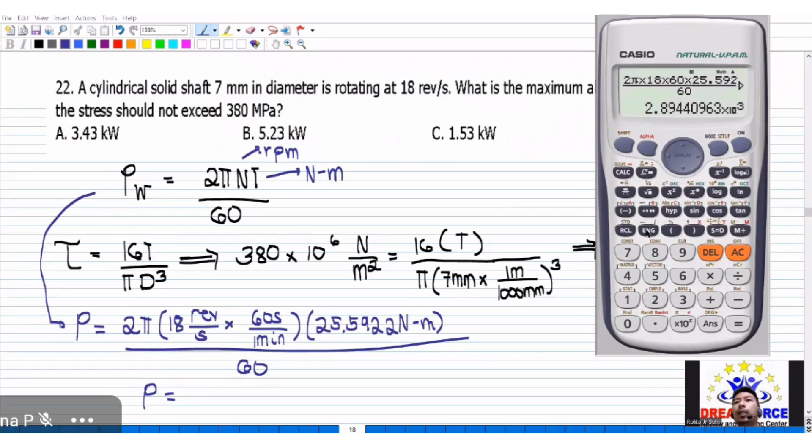So let's calculate. We have 2 pi times 18 times 60 times 25.5922 over 60. Press ENG or divide by 1K para maging kilowatts. So answer is 2.8944, approximately 2.89 kilowatts. So corresponds to your letter D. Okay, so yan si 22.

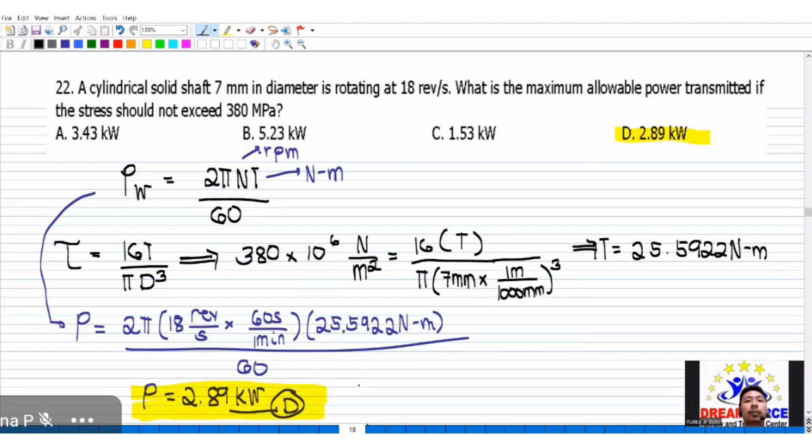Next, number 23. So 23 to 25 ay objectives. The section of a beam at which the bending moment changes from positive to negative is called, answer there is letter C, point of inflection. Again, sa mga mahirap or unfamiliar tayo, yung di natin alam yung concept, kuha ng keywords. Siguro ito: bending moment changes from positive to negative.

Next, 24. Ratio of lateral expansion to the longitudinal shortening of a concrete cylinder when subjected to compressive load. So expansion tsaka shortening, ibig sabihin, pareho sila ng unit. Since ratio po yan, dapat yung sagot mo, unitless. Automatically, pwede mo nang i-cancel yung modulus of elasticity, kasi meron po yung unit, Pascal po yan.

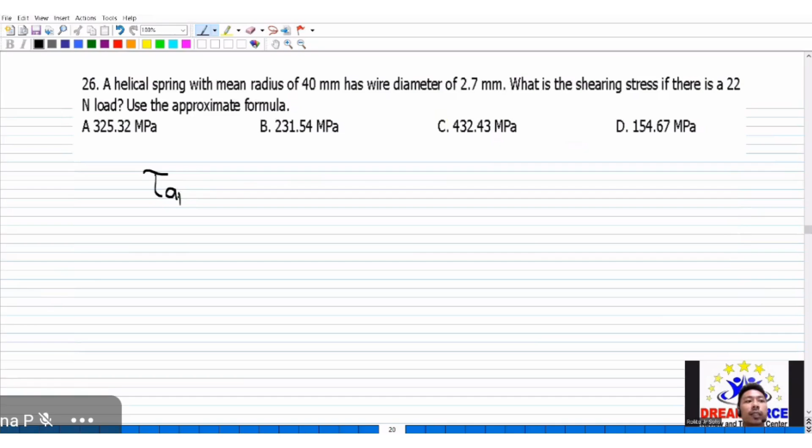Okay, so a helical spring with mean radius of 40 mm has wire diameter of 2.7 mm. So what is the shearing stress if there is a 22 Newton load? So use the approximate formula. Okay, so formula for helical spring. So, di ba yung approximate stress natin? That is equivalent to 16 multiplied by the load, load in Newton, and then the mean radius, divided by pi and then the diameter of your spring, raised to 3.

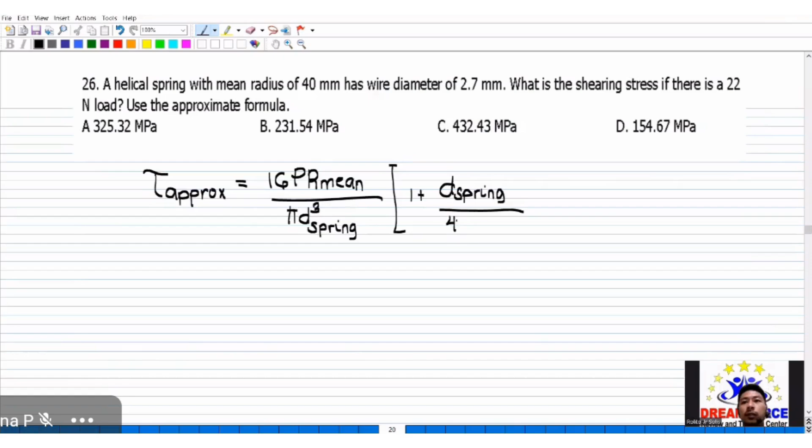And then i-multiply pa natin for approximate yung 1 plus d divided by 4 times r mean. Kapag naman yung exact or yung maximum, ang i-multiply natin dito is yung Wahl's factor, yung may 4m minus 1 or yung 0.615. So that is for maximum stress. Since ang hinahanap lang ay approximate, ito yung gagamitin natin.

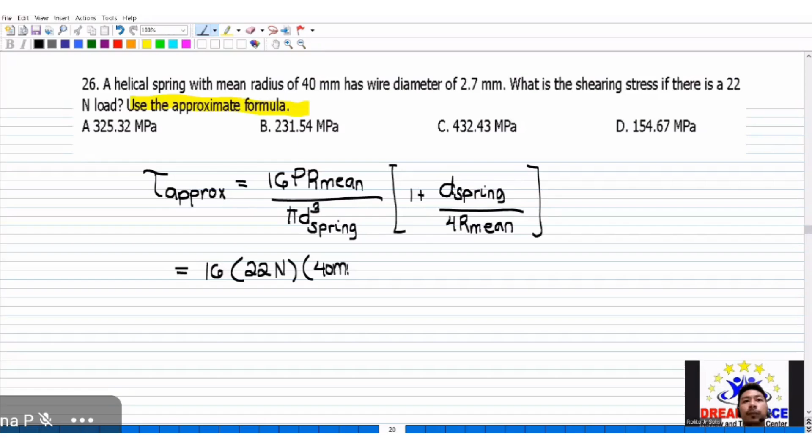Okay, so substitute. We have 16 times the load given, 22 Newton, multiplied by the mean radius. Both are in millimeters. Mean radius is 40 mm. And then divided by pi times diameter. So, be careful engineers, dapat diameter po yan. So, 2.7 mm raised to 3, then multiplied by 1 plus the spring diameter, 2.7 mm, divided by 4 times the mean radius of 40 millimeters.

Direct sub. Millimeter will cancel. So, millimeter tapos millimeter cube magiging Newton per square mm. Alam natin na yung Newton per square mm ay equivalent to megapascals. Again, kung nalilito ka doon at sanay ka sa SI, yun yung gamitin mo. Kaysa naman ipilit mo to, hindi mo naman gets, magkamali pa. Basta makaka-produce ka ng parehas na sagot. So, 4 times 40.

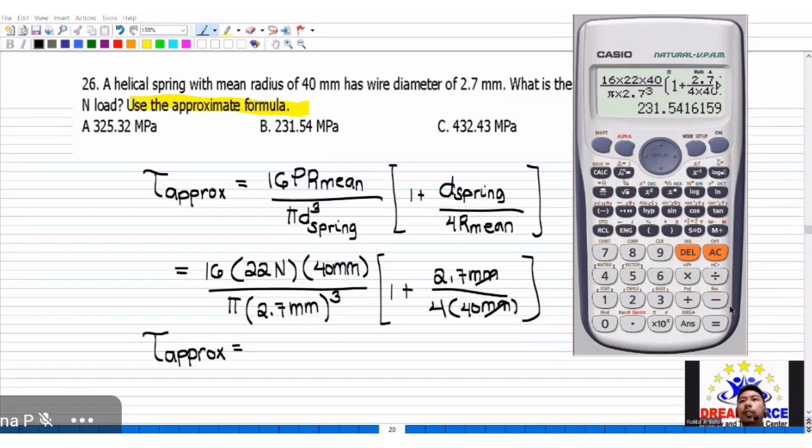So, answer there would be 231.54 Newton per square millimeter, which is also megapascals. So choice is letter B. So that is for approximate. For maximum, use the Wahl's factor. Palitan mo lang ito: 0.615 over m plus 4m minus 1 over 4m minus 4.

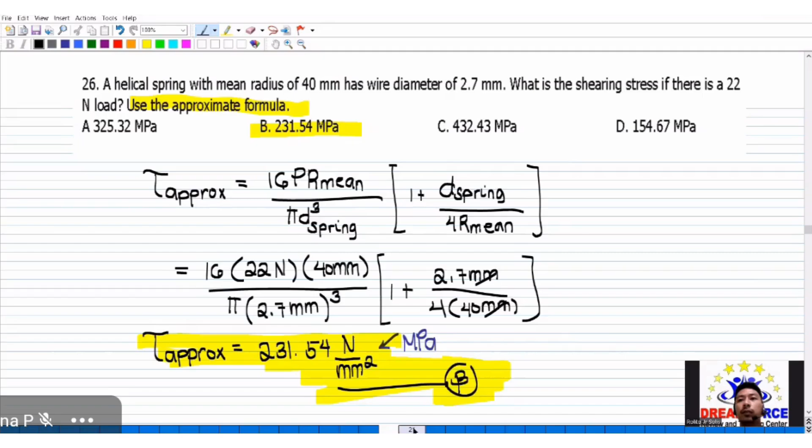Okay, so that's 26. Next, number 27. Concentrated load, maximum moment. A simple beam 10 meter long carries a concentrated load of 500 kilonewton at the midspan. What is the maximum moment of the beam? Parehas doon sa isang number natin. So if you have your concentrated load at midspan, gamitin lang yung formula ng PL over 4.

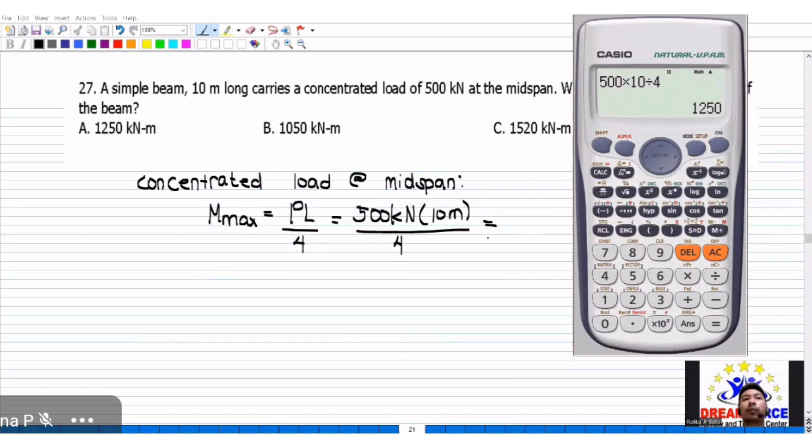So the maximum moment is equivalent to PL divided by 4. Direct sub: 500 kilonewton multiplied by 10 meters, divided by 4. Sa mga ganyang problems na may direct substitution, dapat isigurado mo sa pagsosolve, ganun din sa pag-shade. So answer there is 1250 kilonewton meters. That is letter A.

Next number, dito tayo sa number 28. Maybe sa inyo ay new topic ito. A 20 mm diameter steel rod, 250 mm long, is subjected to a tensile force of 75 kilonewtons. If the Poisson ratio mu is 0.30, determine the lateral strain of the rod. Use E is 200 gigapascal, yung modulus of elasticity ng ating steel. Ang hinahanap dito is yung lateral strain, on the y-axis, kasi 3-dimensional po yan.

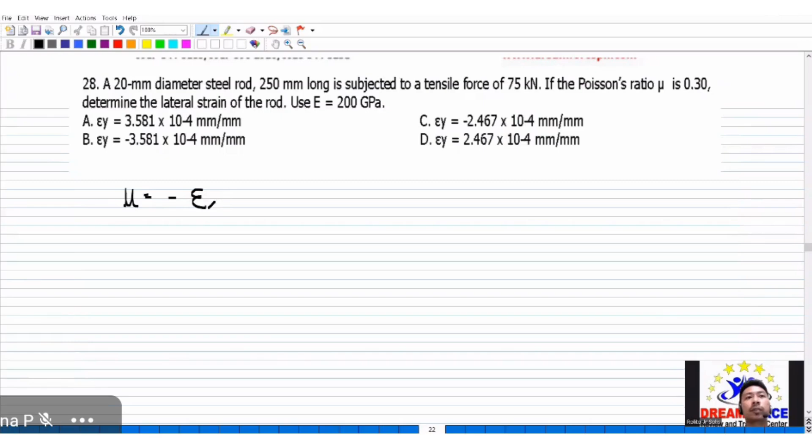Meron tayong formula from your definition kanina ng ating Poisson ratio: ratio of lateral expansion to the longitudinal shortening. Yan pong ratio yung gagamitin natin sa formula, which is negative EX divided by EZ, or equivalent to negative EY over EZ, so longitudinal at saka lateral. Bakit negative? Kasi sabi niya sa definition, longitudinal shortening, kaya negative.

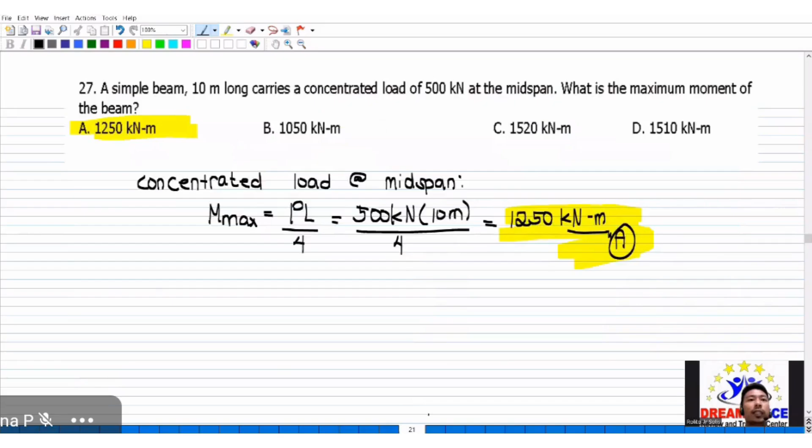From that, pwede nating gamitin any of the two. But since ang hinahanap natin is si EY, ito na lang yung gamitin natin: mu is equivalent to negative EY over EZ. Meron pa tayong formula using yung axial Z direction. Formula for EZ is equivalent to force divided by E times your area. Ang tawag dito is yung axial Z direction natin.

Okay, axial X direction, axial Y direction. So axial Z direction. Okay, so kunin muna natin si EZ. So given naman yung force. Okay, given also E, and then mahanap naman natin si A. Okay, and then later on, substitute natin dito, and then let's get the value of EY.

Okay, from the formula, kung na-analyze mo yun, engineers, dito kasi, shortening. So, ibig sabihin, negative. Okay, kaya negative dapat yung sagot natin. So, pwede nang maalis si A, pwede na rin maalis si D. Okay, so anyway, let's solve first for EZ.

So this is equivalent to your force, 75 times 10 raised to 3 in newtons, divided by E, which is 200 gigapascal. So tandaan yung mga axial Z direction, X, and then Y, unitless. Okay? So from that, 200 times 10 raised to 9. Okay, so we have your Newton per square meter.

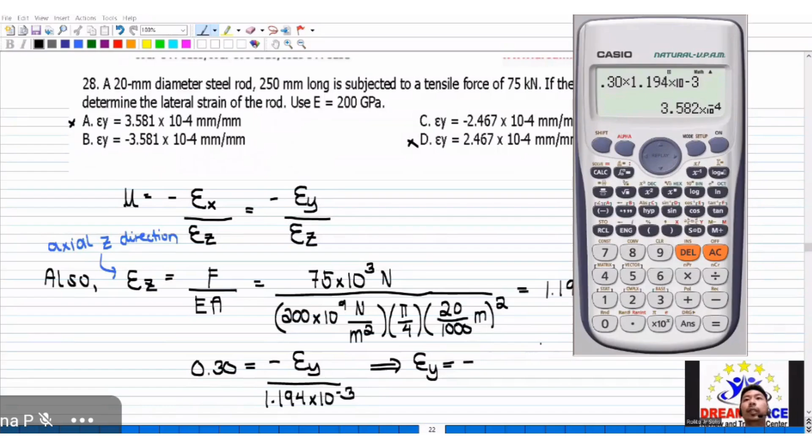Okay, lastly, solving now for EY. Get the value of Poisson ratio, that is 0.3. So this is equivalent to negative EY divided by 1.194 times 10 to the negative 3. Okay, so shift solve. So your EY now would be 0.30 times 1.194 times 10 to the negative 3. So that would be 3.582 times 10 to the negative 4. Approximately letter B. So that is the answer. So si EY, negative po siya.

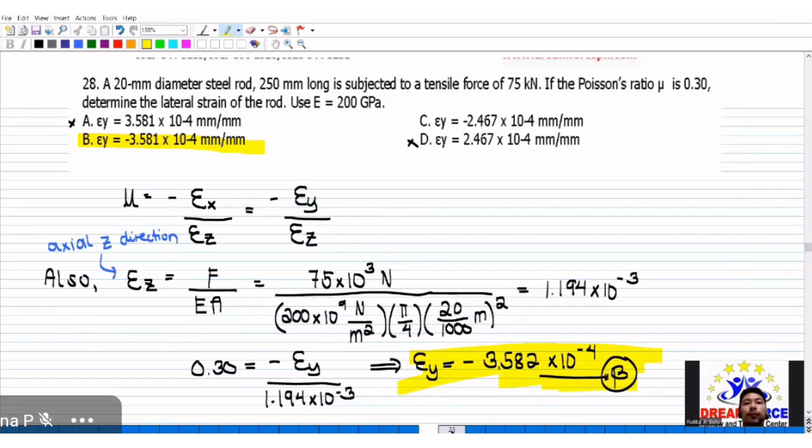Okay, so that's your number 28. Kung bago man, at least may new knowledge. So in case na ibigay sa board exam, alam mo na yung formula. Kung di yan nakuha, bawi sa objectives 29 to 30. The deflection of the beam, nasa formula, nasa objective book ito sa 4.6. Letter E. So inversely proportional to the modulus of elasticity and moment of inertia. Andyan din yan sa 2001, yung formula ng deflection. Hindi na natin tinalakay yon sa lecture kasi malawak or malalim na topic na po yan.

Okay, so number 30, which of the following statements is not true? Kung iisa na yan, pwede tayong mag-analyze. Pero yan, mga materials kasi. So ang sagot po dyan is still letter A. So about 10% of the Earth's crust is iron. Okay, so that's number 30. Nasa Pinoy Bigs po ito.

Okay, so number 31. Ito, solving. What is the stress in an 8-inch round by 16-inch high concrete cylinder? Given yung E natin, 2.5 times 10 raised to 6 psi, when the unit deformation is 0.0012 inch per inch. So yung unit deformation natin, EL, that is also equivalent to yung elongation natin divided by the length. So ito po yung unit deformation.

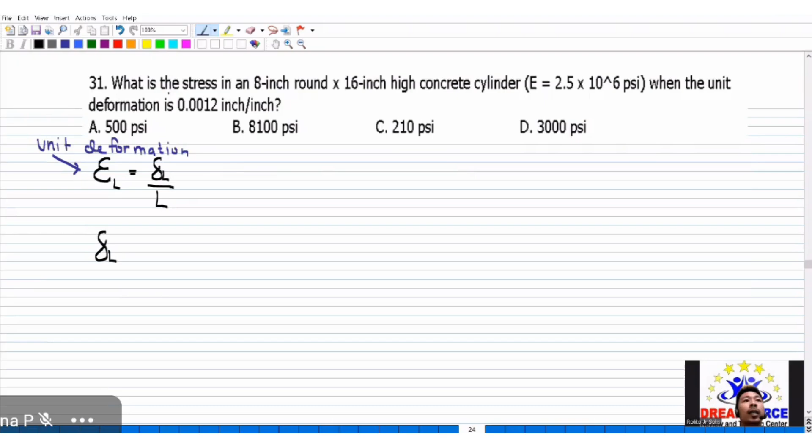So substitute natin. Since walang given na length, assume natin 1. Diba yung formula natin? We have your elongation due to your saan daw ba? Wala siyang sinabi. So let's say due to load. So that is also equivalent to PL divided by AE.

So since ang hinahanap po ay stress, stress is P divided by A. So therefore, elongation is also stress times L divided by E. Pwede mo rin naman gawin, hanapin mo muna si P: substitute mo yung area, hanapin mo si P, and then kunin mo si stress, P over A. Sige, L na lang ito para uniform dito sa formula natin.

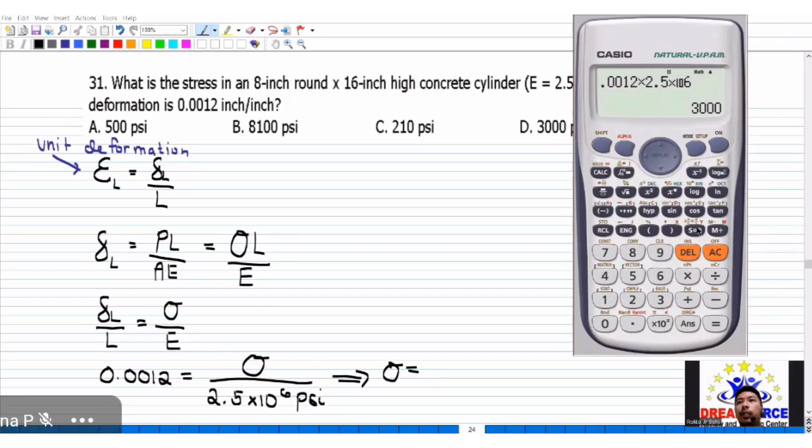So solving now for the stress, elongation over L equals stress over E. So unit deformation is also this quantity. Therefore, 0.0012 is equivalent to your unknown stress divided by the modulus of elasticity, 2.5 times 10 raised to 6 PSI. PSI din yung nasa choices. So shift solve. Your stress would be 0.0012 times 2.5 times 10 raised to 6, so 3,000 PSI. That is your letter D.

Paki-take note itong formula natin. Unit deformation is also the elongation per length. Inch over inch or millimeter over millimeter. Okay, unitless.